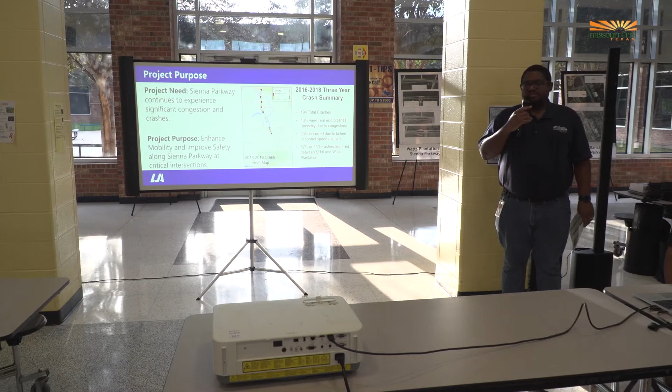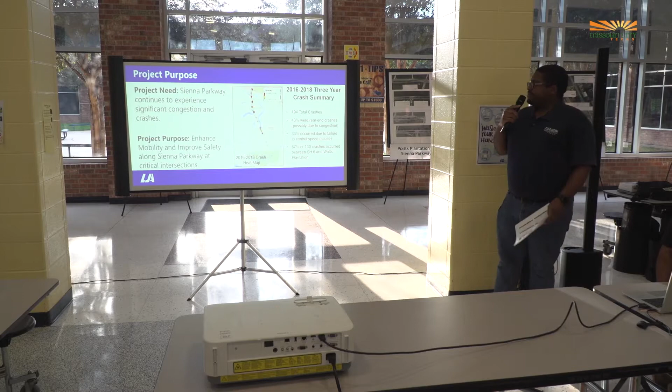As everyone said so far, there has been a need for improvements on Sienna Parkway. We've been experiencing a lot of growth throughout the area, developments and things of that nature. So the purpose of this is to help improve the mobility and safety of the traveling public as they go from north to south on Sienna Parkway. On the right side of the slide, you'll see a crash summary—this data was taken from TxDOT and added to our report submitted along with this project.

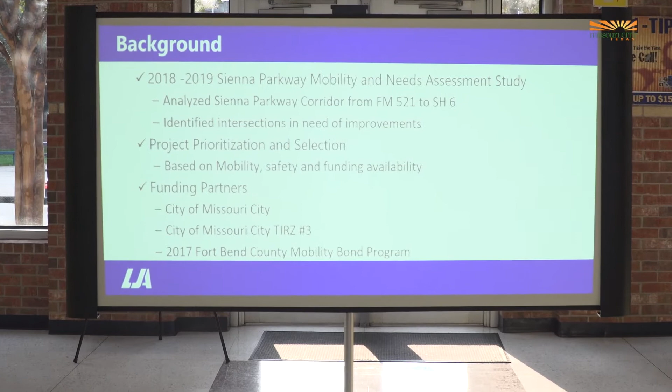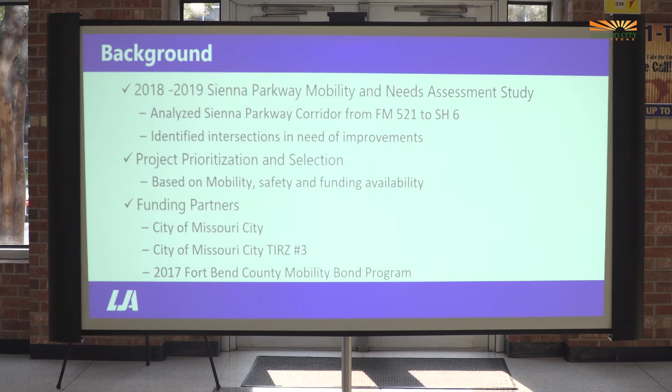A little bit more on the background of this project: this is from the 2018-2019 Sienna Mobility and Needs Assessment Study. The data I just mentioned comes from that study. We analyzed Sienna Parkway's corridor from FM 521 to Highway 6, and the purpose was to identify which parts of the corridor were most affected by heavy traffic and mobility issues. When it comes to project prioritization and selection, we based it on the mobility and safety needs for different parts of the corridor, and most of those needs came towards the north of the corridor.

This project, like Shashi said, has multiple partners: the City of Missouri City, the City of Missouri City Tax Increment Reinvestment Zone number 3, and also Fort Bend County, who funded it through their 2017 County Mobility Bond Program.

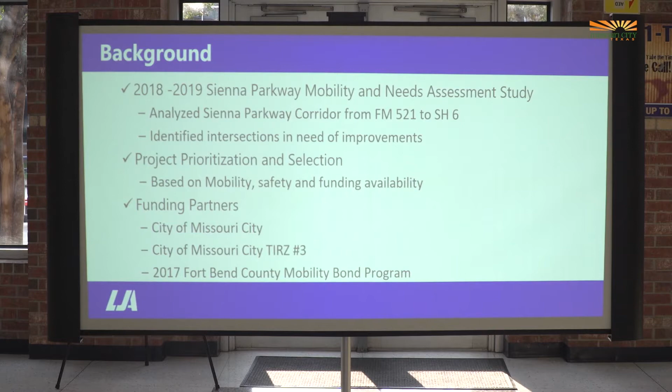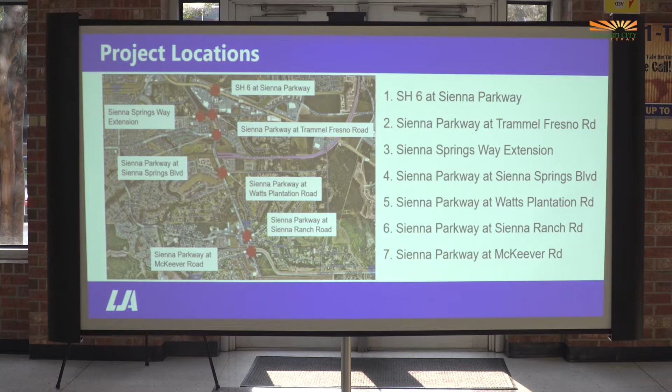This is a list of the project locations, and we also have them bigger in the back when we split into our breakout sessions so you can see them up close. Starting from the top: Highway 6 at Sienna Parkway, Sienna Parkway at Trammel Fresno, Sienna Springs Way Extension, Sienna Parkway at Sienna Springs, Sienna Parkway at Watts Plantation, Sienna Parkway at Sienna Ranch, and Sienna Parkway at McKeever Road.

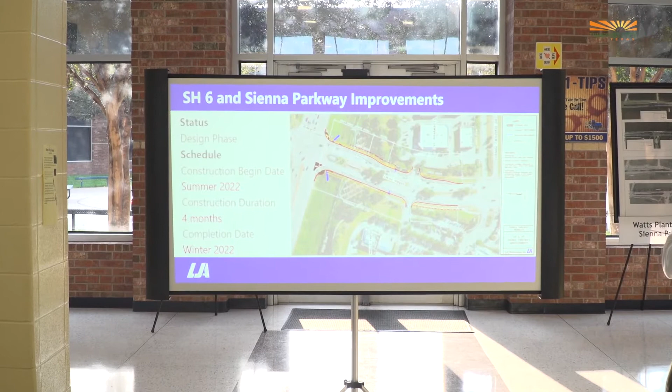I think we have a slide later, but I want to say that we're going to phase these projects, trying to phase them so each one provides a detour, so you're not having all of Sienna Parkway torn up at the same time. We'll phase them to where they make sense.

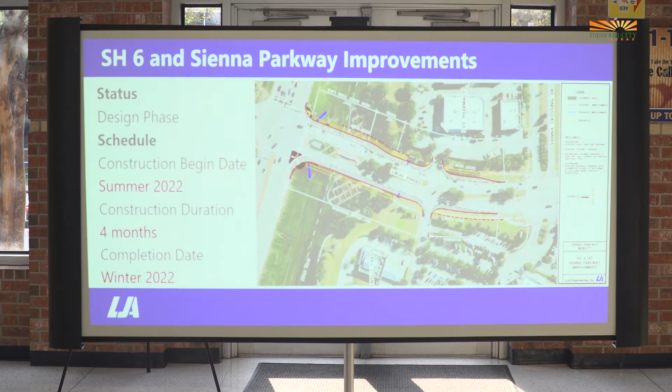We do have the traffic control plans back here. The agenda is to try to move as much traffic north-south on Sienna Parkway. With our traffic control, since it is construction, we're going to have to narrow down the lanes, but we're anticipating keeping both lanes of Sienna Parkway open throughout the duration of construction.

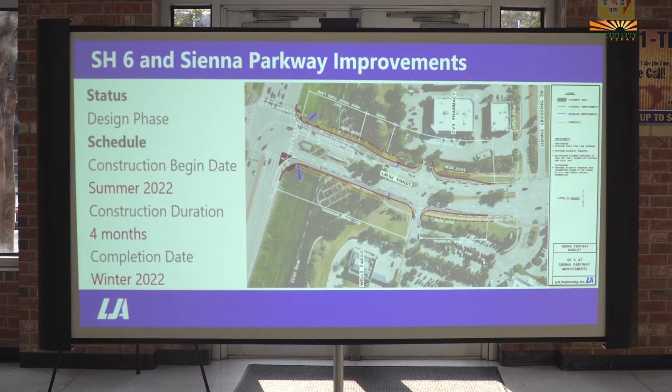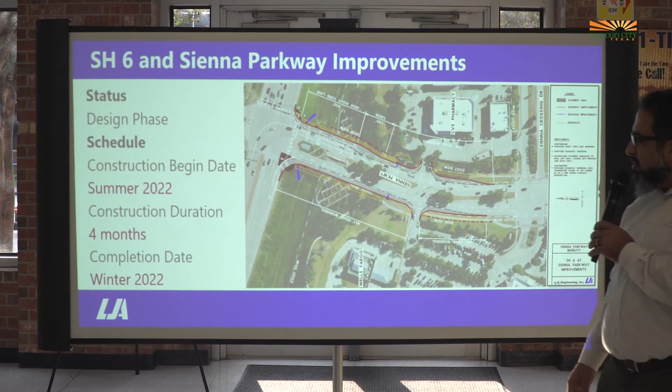At Sienna Parkway and State Highway 6, right now eastbound we would have a channelized right turn lane, allowing people exiting Highway 6 to have a dedicated lane as they enter Sienna Parkway. That would extend down to existing Sienna Crossing, where there's an existing right turn lane. Northbound, we are widening to add one lane of traffic. It's shown as a right turn lane we're adding, but we would reconfigure the whole intersection to allow for a dedicated right onto State Highway 6, and reconfigure the existing lanes to have a dual left onto Sienna or State Highway 6, and a shared through-left to get to the commercial property on the north side of 6.

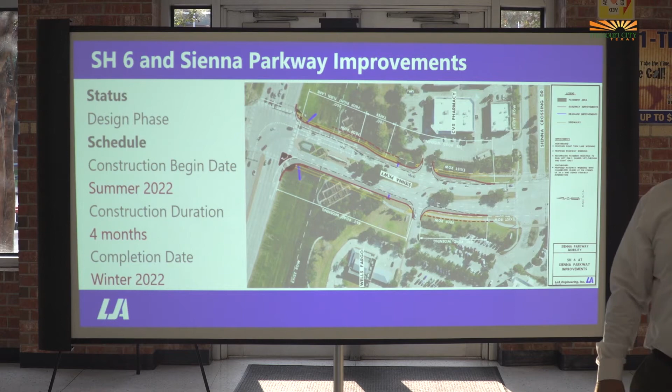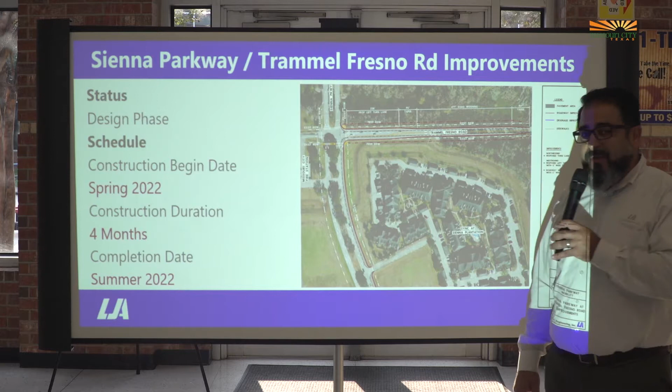On Sienna Parkway and Trammel Fresno, right now westbound there's only 2 lanes entering Sienna Parkway. We would widen that to allow for a dedicated left turn lane. This allows more vehicles to move through the intersection with the signal timing we have. We would take that signal timing and add it to the north-south movement so you can move more vehicles north-south. We'd also add an additional lane to serve as a dedicated right turn lane onto Trammel Fresno, which allows both existing lanes to free flow north-south.

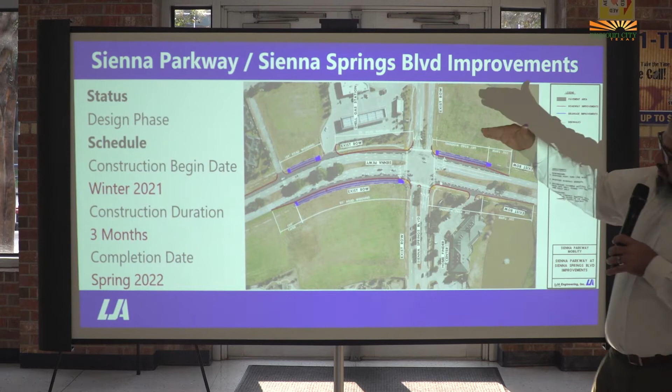That lane would extend all the way down to Sienna Springs Boulevard, the next intersection to the south. I apologize, we did have to move them—I see everyone turning their heads. North is to y'all's left.

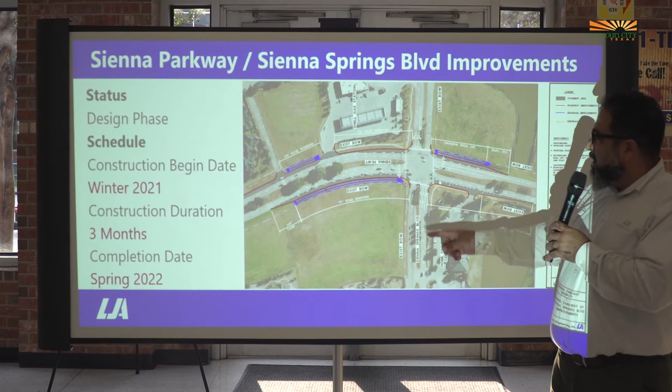So this is Sienna Springs Boulevard where the Shell station is. The concept here is we've added a through lane of traffic, both northbound and southbound. That additional lane will extend through the intersection, then narrow back down to 2 lanes. We already have that at Fort Bend Toll Road and Sienna Parkway—it'd be the same concept. So we'd do that at Sienna Springs, and the next one is Sienna Springs Way.

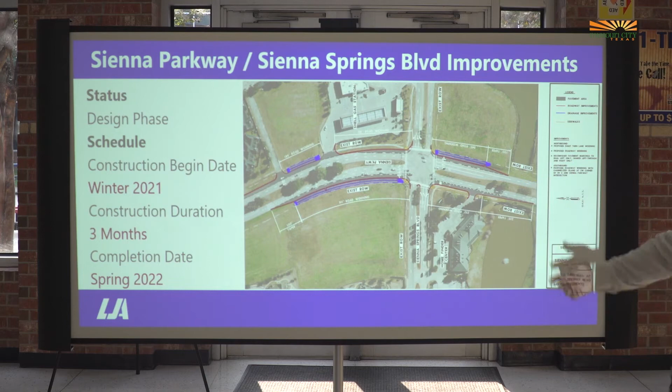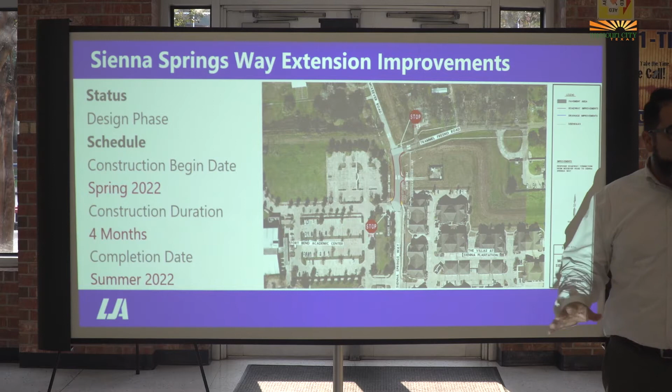We've had a lot of questions on this one. This is for access and connectivity to the Fort Bend County Annex and the library. I want to make sure it's clear: the improvement would just be connecting from Trammel Fresno to existing Sienna Springs Way. North of that, where there are no improvements to McKeever Road, there will be no tie-in of McKeever Road at State Highway 6—there's a lot of obstacles that presents. I know that was a big concern, so we wanted to address that. This would just be connecting the parking lot to Trammel Fresno, allowing those people to get out to Sienna Parkway.

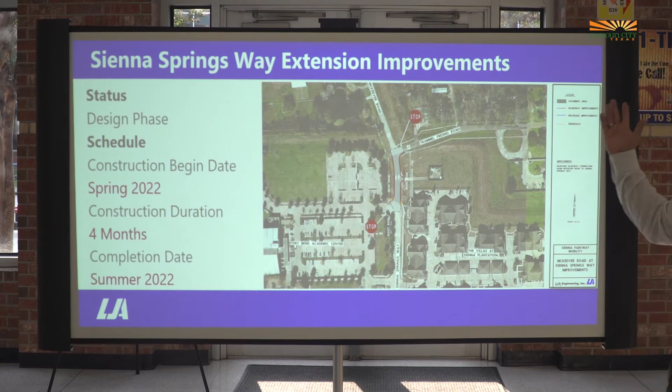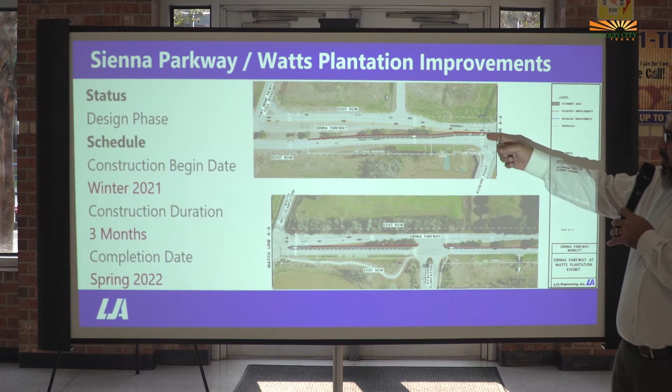At Sienna Parkway and Watts Plantation, same concept, but here we had some environmental issues, so we had to widen into the median. We would add a lane of traffic, reconfiguring the intersection to make the existing left turn lane into a through lane, with the new lane becoming the dedicated left onto Watts. Again, that expansion would extend through the intersection and then transition down after the entrance to existing Avalon Plantation.

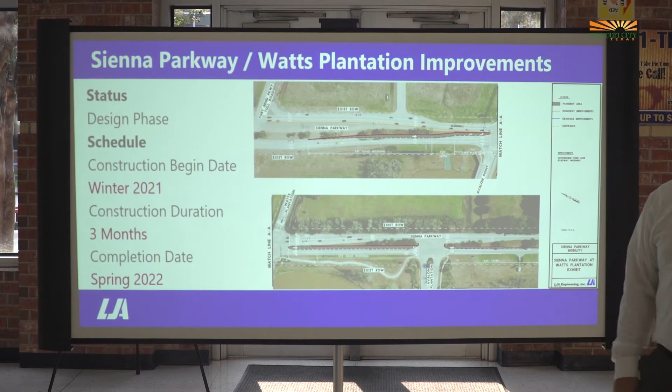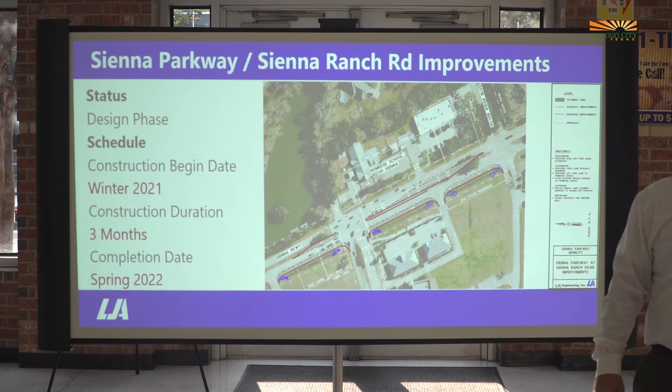Sienna Parkway and Sienna Ranch is one of the most congested intersections, so it takes a little bit more improvements. I'll run through each one. Right now there are dual left turn lanes turning onto Sienna Ranch Road. The issue when that was designed is there's an existing median opening that enters Primrose School and the commercial corner at Silver Ridge.

So what we're proposing is we would close off that median opening. We would add a dedicated left turn lane that would enter into that commercial complex with Primrose. That would give these individuals, instead of having to cut across two lanes of traffic, a protected left into the daycare and the commercial area.

In addition, on the southbound side, we would add that through lane all the way through the intersection, turning into a dedicated right. Closing off this median allows for that — right now this traffic backs up all the way past Silver Ridge, which also blocks people trying to enter there. This allows two full lanes to queue, maximizing those lanes all the way back to Silver Ridge.

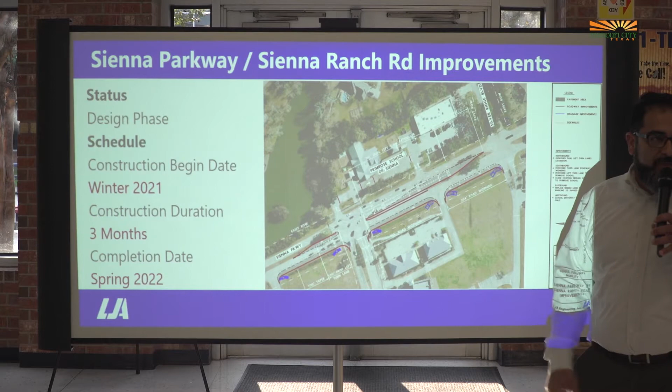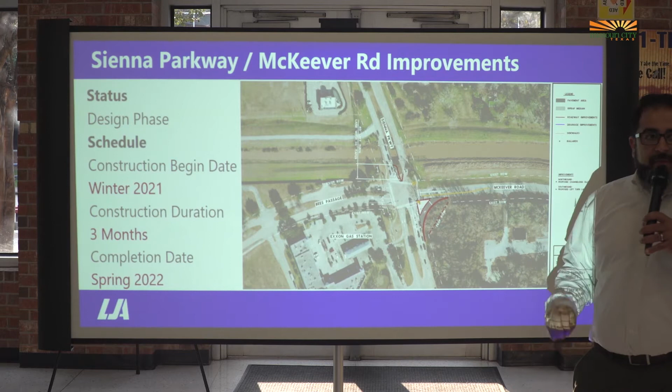And then the last one is also one of the high priorities. Right now there's no existing southbound left turn lane onto McKeever Road. There are some constraints with the existing bridge over GCWA. The first phase of this project is to add a left turn lane that would allow for approximately two to three vehicles to stack, getting those vehicles out of the through lanes and allowing them to move southbound.

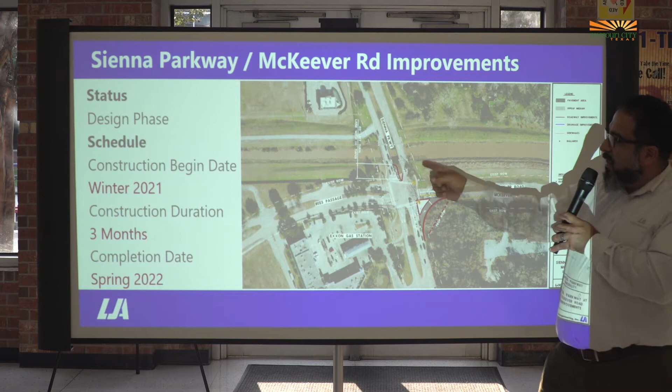One of the future projects, with the TIRZ funds we just sold, includes the ultimate design of that, which would allow for that left turn lane to be designed per criteria and extend past that GCWA canal. In addition, northbound, we would have a channelized right turn lane onto McKeever Road, which would allow you to get out to 6 and alleviate that.

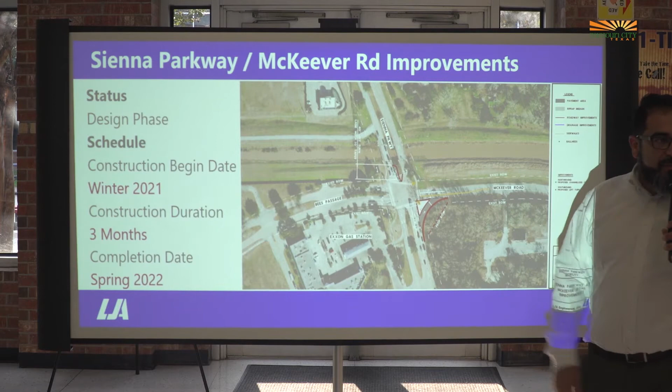So some of the future projects I mentioned — McKeever Road, the reason we're restricted right now is those two lanes are over a bridge, so we would widen that bridge to allow for a longer left turn lane. Shashi mentioned the Trammel Fresno road improvements, Watts Plantation, and in the south, not in this area, they're proposing widening Sienna Parkway from existing Waters Lake and the southern connection of Waters Lake as you continue down Sienna Parkway next to the other schools. They would widen it from there approximately a mile to the east, basically halfway between 521 and Waters Lake Boulevard.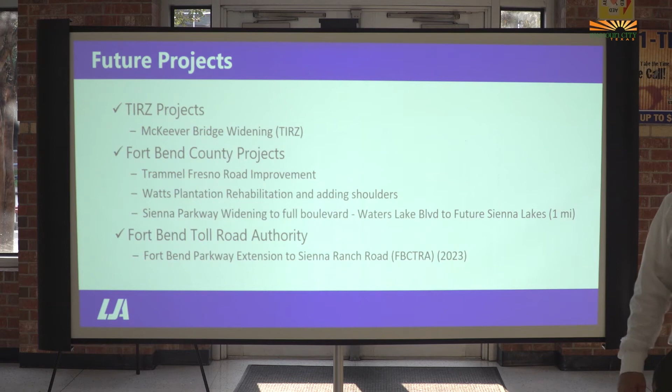And then the Toll Road Authority has a project, the Fort Bend Parkway extension, that goes to Sienna Ranch Road. That's projected out a ways.

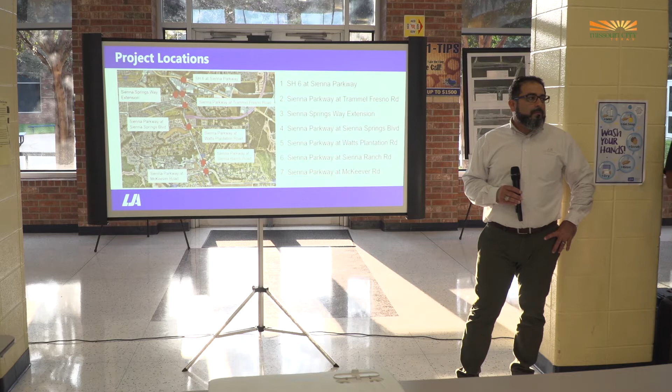But I think a major issue we have here are the people who do not live in Sienna who have to cross Sienna Parkway with people going 45, 55 miles an hour. And if we try to push more cars through on a wider Sienna Parkway, those of us who have to make that harrowing left into Silver Ridge or make a right out of Silver Ridge, while people are crossing the bridge over the waterway — because it's a very oddly aligned bridge, you have to go up, then turn and come down — very few can barely see those coming out of Sienna Parkway, out of Sienna.

I'd like to see that issue addressed, hopefully, because I think that's the major safety issue. The traffic issue we have is the risk of people running into each other, driving too fast, or those of us turning out who can get T-boned. That's where our real danger is in this situation. I'd like to see some concern about those of us who do not live in Sienna, because I think we're the ones most at risk.

Thank you for your comment. I think the biggest question, like the Commissioner touched on, everyone touched on, is that this is a Sienna Parkway mobility project, but it serves several of the different communities.

Commissioner, I want to address that question a little bit. We had to start somewhere to start doing the mobility improvements. So a study was done, and it recommended these are the 7 critical improvements that we need to do. I want to emphasize that this is just the start, this is just the beginning, this is not the end of Sienna improvements.

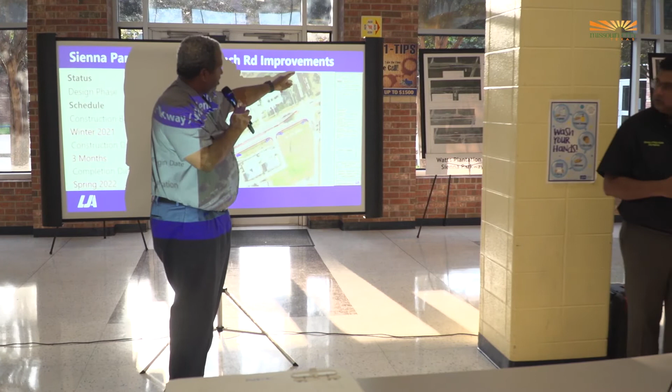Coach, I want to get this right. You live here, you come out here — are you concerned about right turn or left turn? Left turn? You have to make a left out, you have to make a left in. And the right is actually a challenge as well, you know?

Because you either run into people who will block the intersection, or you run into the intersection so freely, people who drive fast on the intersection.

So this is obviously just a peak time thing you're concerned with, right? Actually, it depends on the day. If it's a peak time, you can be blocked. If it's not, you have a speed issue where you literally have to smash into the floor so you don't get run into by someone going 50 miles an hour coming out.

So let's see if we can do this. On the study, or on the plans, was there any traffic counts done here? Yes, okay. So that's the important thing. We want to see just what the — because, ultimately, you've got to do what the Uniform Traffic Guide says. And I'm sure that the traffic on Silver Ridge... what I'm concerned about is that we're going to set those lights.

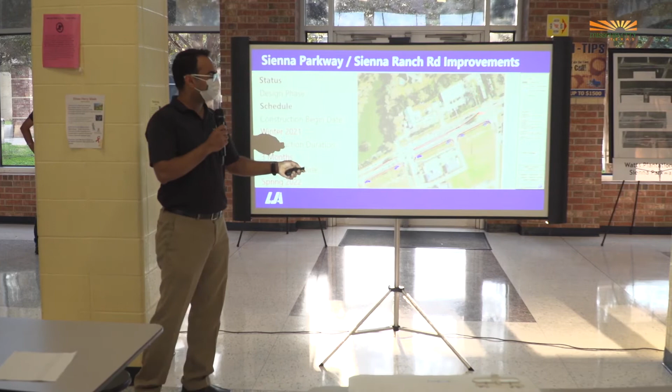I just wanted to point out a couple of things. We did do a signal warrant analysis at this intersection back in 2019, when we did the mobility study, and the signal didn't warrant. Although the signal didn't warrant, we did take into account the safety concern over there. So what we did to accommodate that movement is the dual left turn.

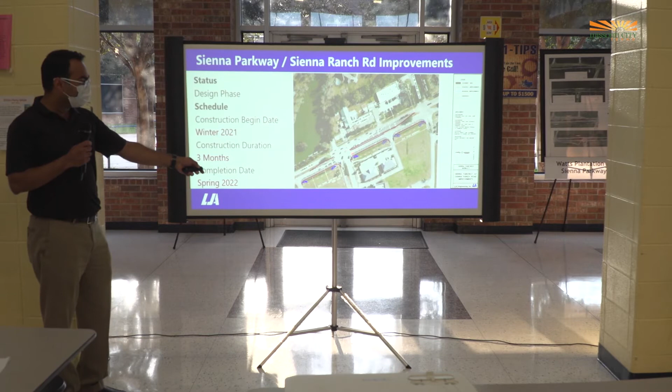We are adding additional pavement to the other side of the roadway, to the south side. So previously the vehicles were unable to make an easy U-turn. Now the road is wide enough to make a sweeping right U-turn more safely, with a dedicated left turn signal to make that U-turn possible. This is safer than trying to get out of Silver Ridge and make a left.

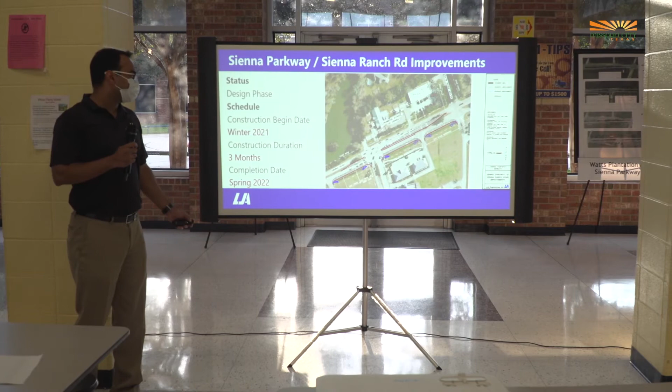So now you tell the Silver Ridge residents to go right, and then when they turn to go in, elementary kids have to make that turn. That's probably the turn made by most elementary school kids and the school bus. You're aware of that, correct? So that's the issue — we need to get out of our neighborhood settings, right? And the thing that scares me the most is living and making that turn on the bus route.

That's a huge issue. Don't get me wrong, I understand people get really concerned about so much traffic, but I also want to be able to make a left turn into my neighborhood safely and out of my neighborhood safely.

Yes, I have a couple. On the sequencing, I don't think you mentioned what the total time span is estimated to be on the various projects.

I have another question too. With respect to sequencing, we try to add what the construction duration is for each job, and then we also put estimated completion date. Again, all of these are...

We can talk more in the back, in the breakout session. We do have a plan on how to build each one of these improvements. Like Noe mentioned, we are going to phase it so not all the projects go at the same time and tear up the entire Sienna Parkway. So we're going to start from the critical ones to the south.

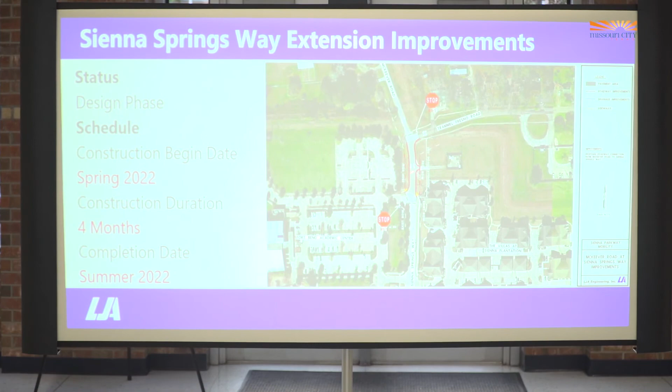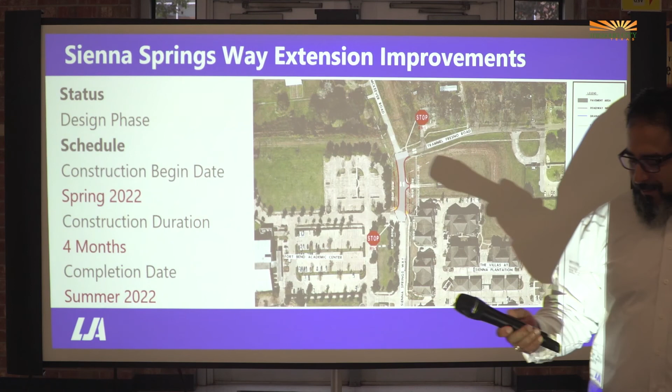Very good. Any more questions before we break out to the sessions? Any generic questions on the project? Otherwise, if you have specific questions at the intersections, we'll break out to the intersections and take those questions.

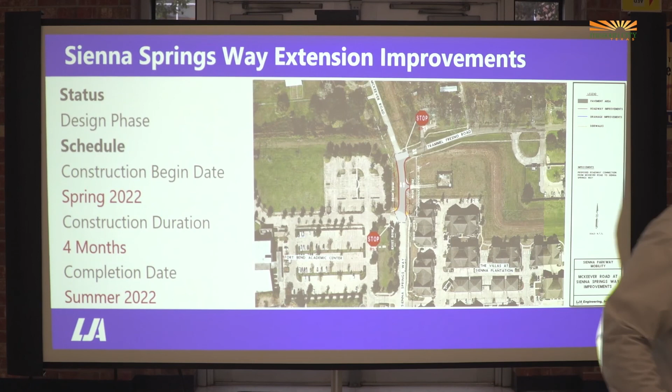What issue precipitated the need to extend Sienna Springs up to Trammel Fresno? Why? When the county acquired that building, we looked at a number of things to try to make it functional. The college has a certain traffic pattern and attendance, and the annex does too. It looked like it made sense to connect it across the levee so the ambulance can get out without going all the way around Sienna Springs Way. So we thought it made sense to connect it.

You have Stub Street with a barricade there, why not connect it? Emergency response was my primary concern for the ambulance. Before we bought that annex, the ambulance was housed in the city's fire station. When we purchased the building, we had to justify what we're doing. Right now that building houses a lot — units, our training facility, our billing and collections operation, full dorms. It's really a major hub for our EMS service, so there's a lot of traffic going in and out. We thought if we saved a minute or so getting out, it might save a life.

I'd like to ask, on Trammel Fresno coming from Highway 6 to Sienna Parkway, is that being widened to four lanes? No, this is just the interchange and intersection — there are some improvements there. As mentioned, we're adding a dedicated westbound left turn lane to get onto southbound Sienna Parkway, and also adding a northbound lane that extends from the Sienna Springs intersection all the way north, eventually becoming a right turn lane at Trammel Fresno.

What about Hazel? Yes, it's on the screen right now. My intent is to improve that section all the way to Starbucks, to make it safe. It's narrow, there are mailboxes and a lot of things we can do, along with sidewalks. The most important part to me is when you cross the creek — there's no guardrail, there's nothing. It's amazing there are no vehicles down in there. It's a blessing, I don't want to take a chance.

They may be in there, we just wouldn't see them because of all the weeds that have come up. So the prevailing standard in the area, as I mentioned, is for concrete street, curb and gutter. That antiquated two-lane asphalt road with deep ditches and a creek with no guardrail and no lighting is not acceptable. We want to improve that intersection and that roadway. Right now we're talking about the intersection, but we're going to tack on improvements and continue all the way back.

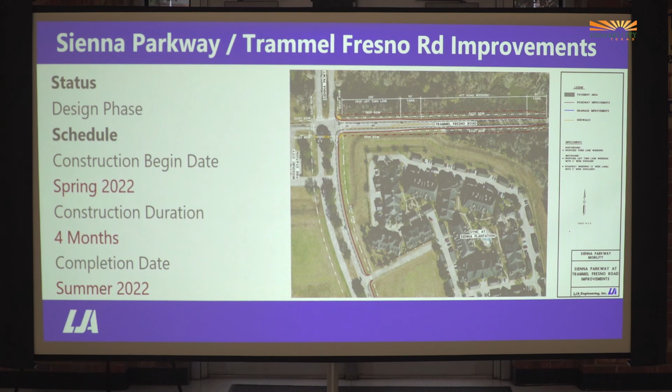No more hands? I know the weather is getting better and you all want to get home. Our goal here is to end this meeting at 7:30.